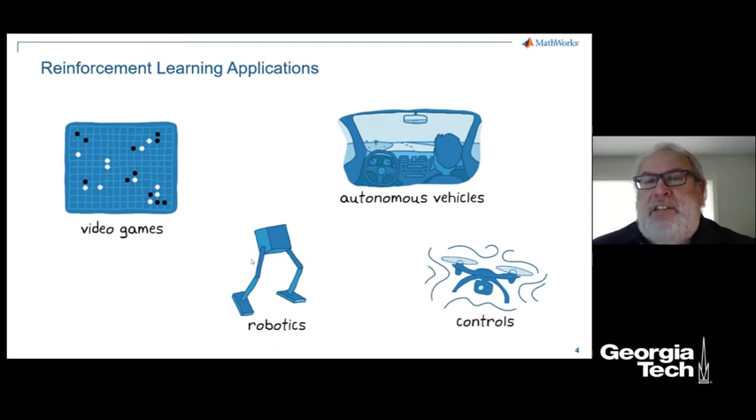So there's a lot of applications for reinforcement learning. Some of the most popular that you see in the news is with video games. You see stuff with the Atari games, AlphaGo beating the world champions. So there's a lot of video games and game type applications that we see in the news, which is very exciting. But it can also be used for autonomous vehicles, controls such as drones, and robotics. And the robotics application is the one we'll focus on today.

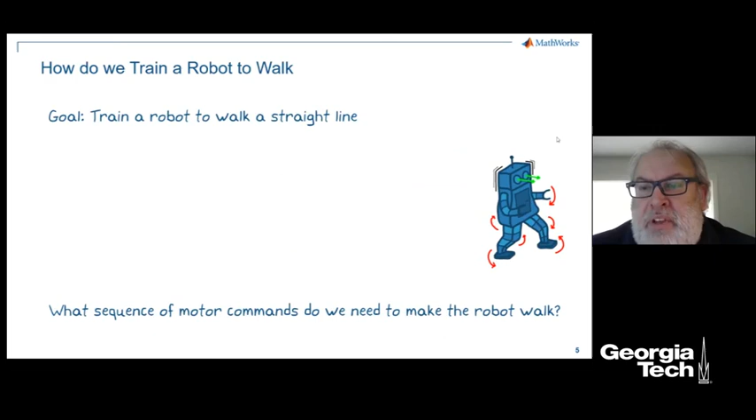So our goal today is to train a robot to walk in a straight line. So how would we go about doing this? So we have several motors that actuate the joints of the robot, and we need to determine what is the sequence of motor commands that we need to use to make the robot walk, right? So by selecting the right set of motor commands, we can get a locomotive behavior from the robot.

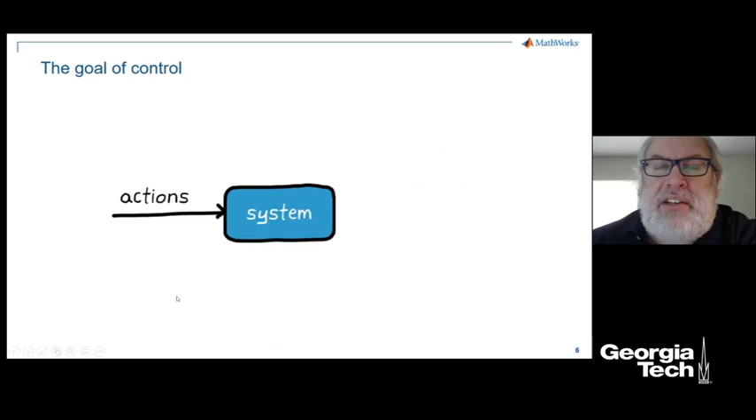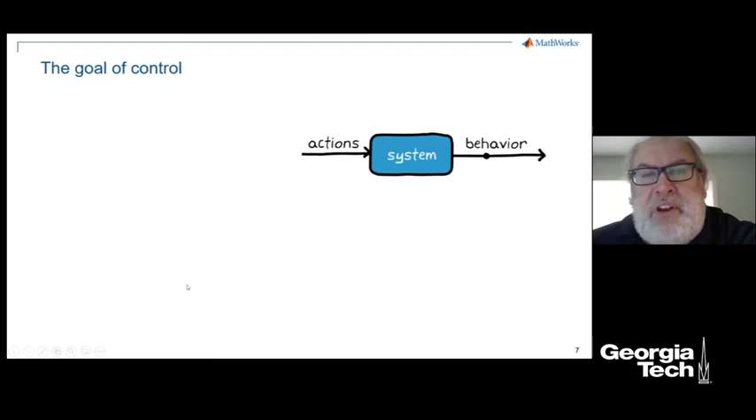And so typically you do this with control, right? So we have a system here. We provide some actions to the system, which results in a behavior. And the goal is how do we determine what actions generate the behavior that we desire? And typically, if you're familiar with feedback control, this is a standard problem where you observe the behavior. This could be observing the behavior through different sensors, such as encoders, accelerometers, vision systems, etc.

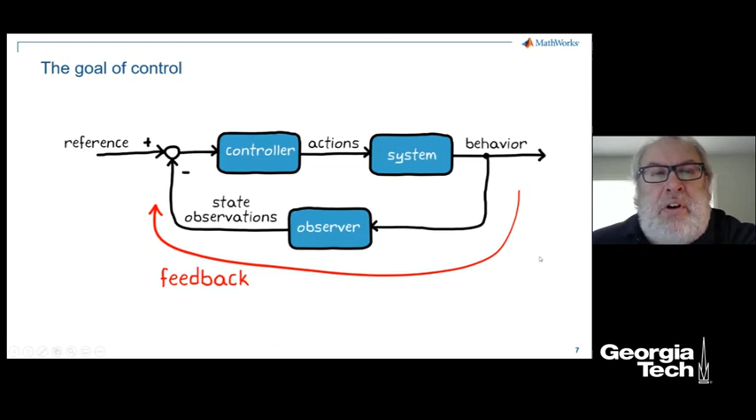You take these state observations and you compare them to what your desired behavior is, and then the controller works on this error between the desired behavior and the actual behavior of the system to determine what actions it should take next to try to achieve the desired behavior. And this is the concept of feedback control. So applying this to our robot system with the traditional controls approach, here we have observations, so we could have camera data coming in and sensors coming in from encoders from the joints, accelerometers, etc.

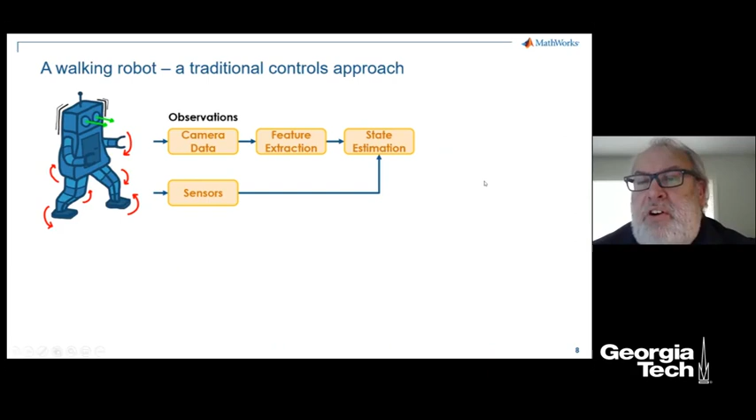And we want to determine data information from the system. To start out with, typically you would do some perception. You might have a vision perception engineer extract features from this camera data. And then using the sensor data with these visual camera feature extraction, you would do some sort of sensor fusion and state estimation or localization to get information about your current pose, where you're at in the environment, your current

state. And then you would feed these states into a control system to determine what motor commands you should use to generate the desired behavior. And in this case, we have 6 motor commands. We have one for the hip joint, knee joint, and ankle joint for each of the legs.

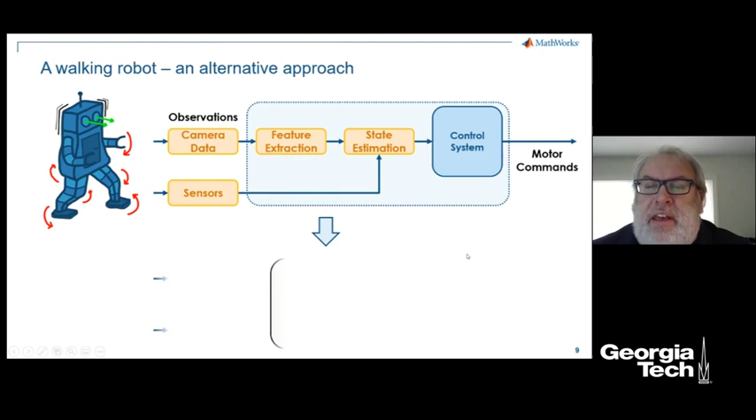So could we look at an alternative approach to solve this problem? What if we took all this stuff and lumped it into a single black box controller? So here we want to take the camera data and the sensors, put it into a controller and generate the motor commands explicitly. This would be nice if we were able to do this, but the question is, how do we design this complicated black box system?

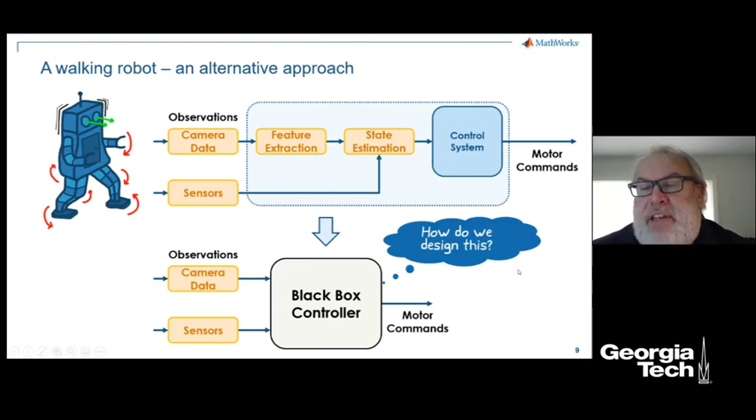And one way is reinforcement learning. So what is reinforcement learning? We'll use the definition that Sutton and Barto used from their famous reinforcement learning book. Reinforcement learning is learning what to do, how to map situations to actions to maximize a numerical reward signal. The learner is not told what actions to take, but must discover what actions yield the most reward by trying them.

An easy way to think about this is teaching a dog new tricks, right? So I have a dog here. The owner yells fetch and throws the stick. So the observation the dog sees is the stick flying and the owner yelling fetch. The dog may decide to fetch the stick. It may sit down. If it fetches the stick and comes back, you give it a reward, a treat, right? So you're reinforcing a behavior that you want the dog to learn.

And so that's the principle that we're doing. If you ever trained a dog, you'll notice that it's a lot of interaction getting the dog to do the right item. And then once it does the right action, give it a reward, and then it reinforces that behavior over and over again.

So before we get into solving the reinforcement learning problem, I'll go over some of the terminology that's used in reinforcement learning. There's 2 main components: the agent and the environment. The environment would include the robot or any physical items that are being interacted with. And the agent is really about the logic used to take observations and send actions. So you can think of it sort of like the brain.

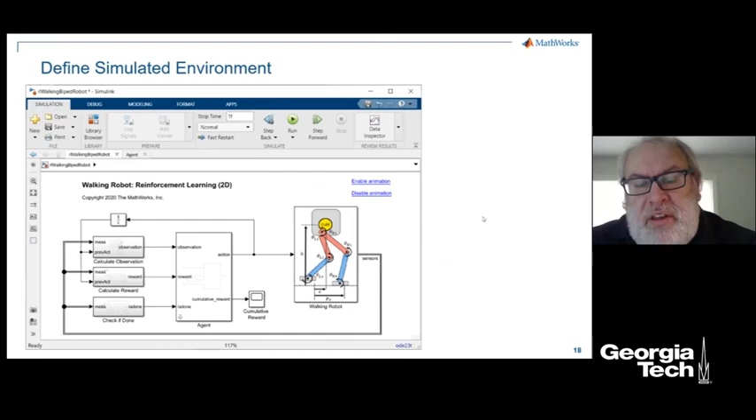So with that being said, we'll be focusing on a simulated environment. Here we're using Simulink to model the biped robot. We're actually modeling the robot using our physical modeling toolbox called Simscape. And we're able to model the dynamics of the system as well as the contact forces with the environment.

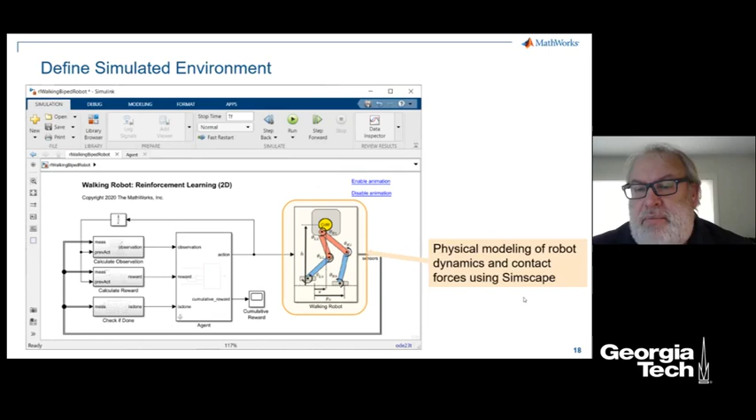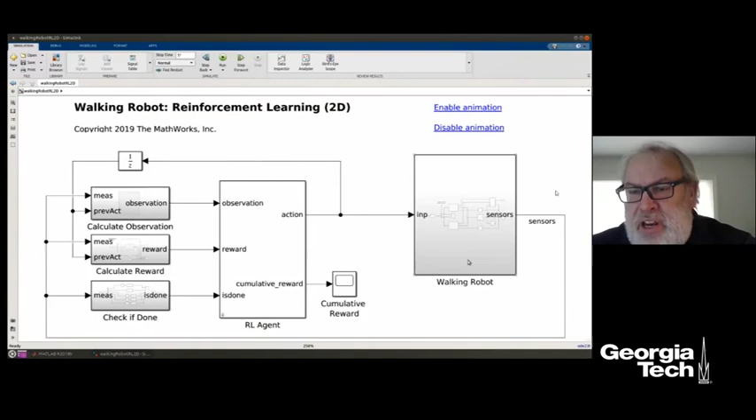If we take a look into this model, we have a couple blocks. We have the agent block, and then the walking robot, which represents the environment. We represent the robot's legs, left and right. We have some sensors, our world and ground, hips and torsos, etc. And we use the physical modeling package to represent each of the revolute joints and legs of the system. If we look into the sensors, we're measuring quite a few parameters of the system, which we'll be feeding back into our observations.

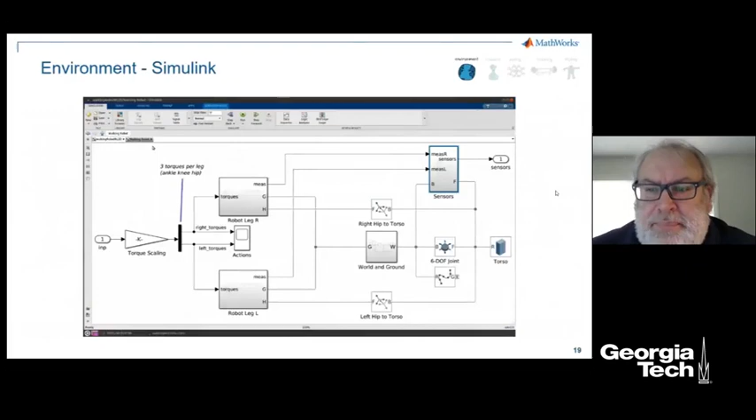The next piece I want to talk about is the reward. So now that we defined the environment, we want to focus on what is the reward for the task that we're trying to solve. So as I mentioned, the reward is a function that outputs a scalar number that represents the immediate goodness of an agent at a particular state taking a particular action. And our goal is to maximize this long-term reward for the system.

So in defining the reward, how do you translate a behavior into a numerical value, right? So we have to create a numerical value which encodes the behavior that we're trying to learn. So you can think of it as, how do I incentivize the robot? Is this the way you want me to go? Put some money out in front of the robot.

So what we did was, this is the final reward function that we came up with, and I'll go into further detail about how we came about it. But our reward is our current forward velocity, which is our goal. We want the robot to walk forward. We also don't want the robot to stray too far away from the straight line, so we have a deviation from the center line as a penalty.

We also want to make sure the robot stays upright, so we want to keep the robot at some nominal height. So we have a nominal trunk height that we want to maintain, and as it deviates, it penalizes from that. We want to make sure it walks as long as possible, so we're giving it a reward for each time step it remains upright. And we also want to minimize actuator effort, so we actually penalize how much torque we are providing to each of the motor joints.

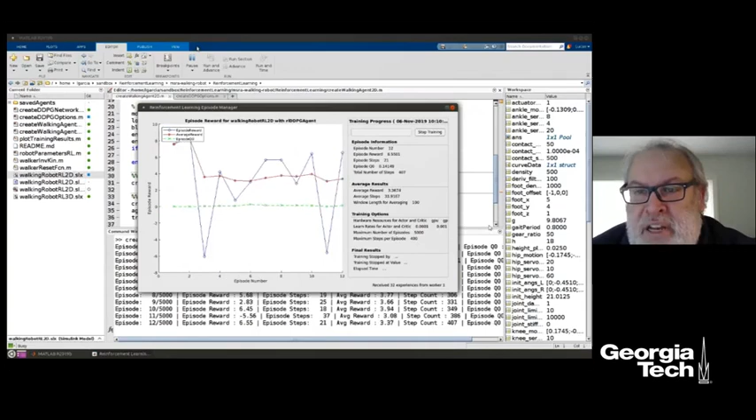So here's a video of it running. Initially it's running at real time here, and then eventually we speed it up for time purposes. But you can see the number of episodes. You can see it starting to run. Initially, we don't see it learning very much at the beginning, but once it learns to take a few steps of walking, it actually improves its learning quite a bit.

Here we have a dip. So one thing that's interesting with a lot of reinforcement learning methods is you'll go through these peaks and valleys of learning. But the good news is the trend is moving up. So our walking is improving the more samples that we take. And so here we see we ran 2,418 episodes.

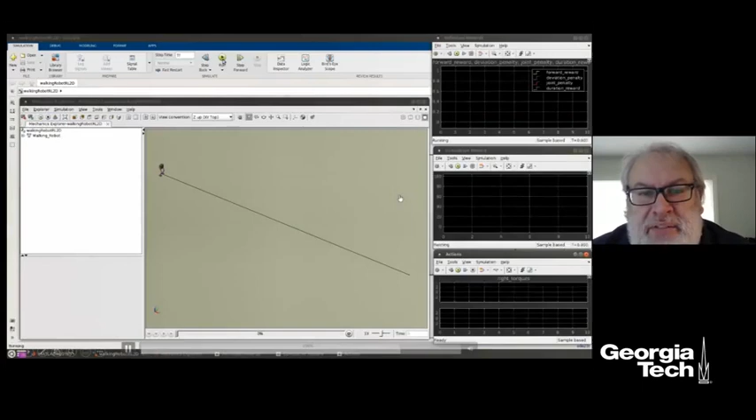And then finally, with that trained agent, we press play to walk with that trained agent. You can see that the agent's walking well and walking along the straight line. As it starts to deviate, it moves back to the center line. So here we saw an accelerated view of the training process and the final results of it walking. But let's look in a little bit more detail at how we got here.

Oftentimes you need to do reward shaping as part of the training loop. Oftentimes you'll see that the agent's having trouble learning, so you want to give it more incentive to learn and improve sample efficiency. So oftentimes there's a little feedback loop that you go through adjusting the reward system or the reward function. So why does the reward function matter so much?

So if you just started out, you might say, I want my robot to walk forward. So let's start out by just creating a reward which is just purely forward velocity. As we ran this with just this reward, it tended to get stuck in a local minimum of wanting to just fall forward. So it gets initial forward velocity. If we trained it longer with more exploration, maybe it would eventually learn to walk. But there's not much guiding the robot on what type of behavior it should be trying to achieve.

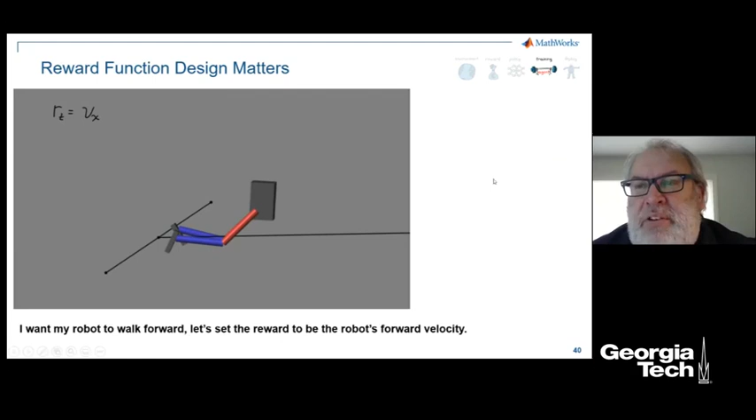So the next step we did was, let's add a reward for each time step the robot remains upright, and also give it a penalty for not maintaining a certain torso height. If we do this, we see that the robot does a better job of walking. However, it's not ideal. It's very zombie, very non-smooth. Looks like it's going to fall over a few times, but manages its balance. But it did do what we wanted it to do. We wanted it to move forward and maintain a torso height.

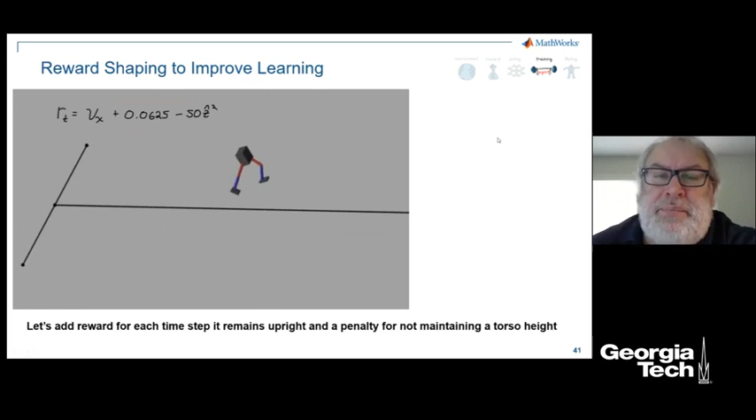So the next step, what we did was, let's add an additional penalty for the energy used for actuation. So here we added a penalty for the energy used in the motor torques for each of the joints. We look here, we see we start getting really good walking behavior, right? And it's walking more like a human. And if you think of a human, it evolved to have pretty efficient walking behavior, so it's kind of expected that this type of behavior would emerge as you start to penalize actuation and you want more efficient movement.

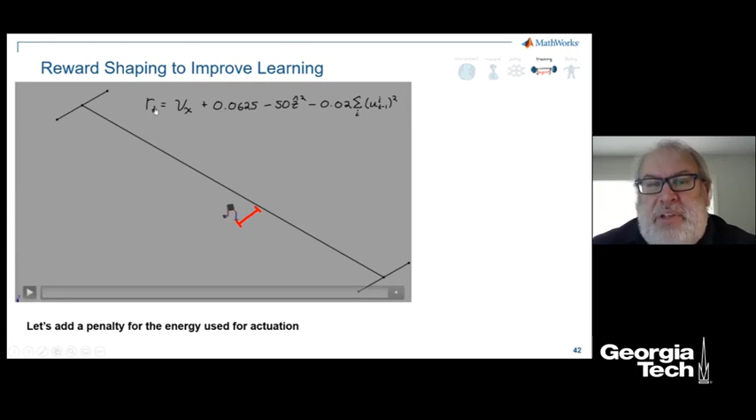However, you saw that the robot doesn't really maintain the center line. You can see that it deviates from it. And we never really told the robot explicitly in this reward function that was part of the task. All right. So the next step, we added a penalty for deviating from the center line. Once we do that, we see that we get good walking behavior. When it starts to deviate from the center line, it starts tracking back to the center line.

So the main key takeaway from here is the reward function matters. The sample efficiency of a reinforcement learning algorithm learning a particular behavior can be dramatically affected by how you incentivize the agent through the reward function. So now that we have a trained agent that we like, we did this through simulation. Now we want to deploy it onto a real robot.

Currently, there's a couple ways you can deploy to target. So here we have our offline simulation. We have a reinforcement learning algorithm, the policy, and then the simulated environment. And we're going to take this policy and put it onto the target hardware to see how well this policy works in the real environment. You can do this in the Reinforcement Learning Toolbox to automatically generate C or C++ code for the policy, as well as CUDA code if you're running on a GPU, to run the policy on an embedded device.

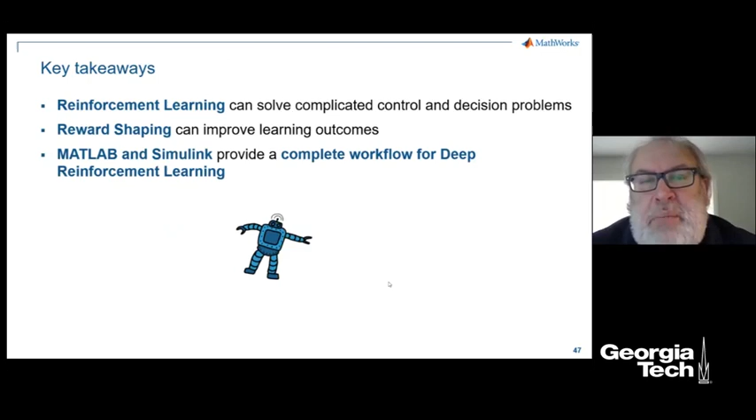Reward shaping is very important in improving learning outcomes. We find this is one of the trickier parts, coming up with good reward functions that improve sample efficiency as well as map out the desired behavior that you want your agent to learn. And then MATLAB and Simulink with the Reinforcement Learning Toolbox provide a complete workflow for deep reinforcement learning. So here we went through the example for this biped robot. This is a shipping example, so you can actually find it in our documentation as well.

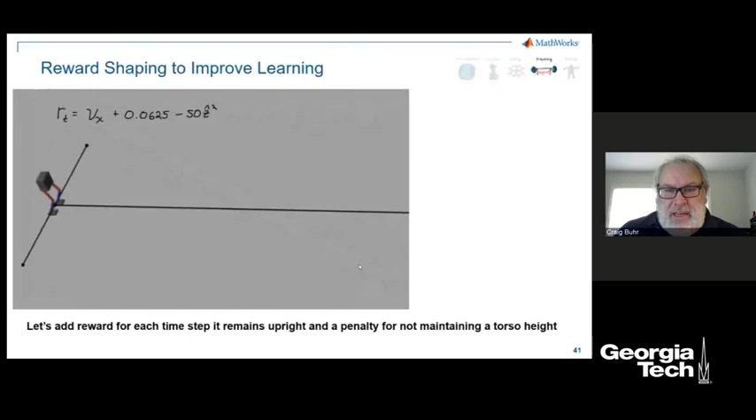So there are a lot of questions in the Q&A. Noah asks, how long did it take in real time to train the biped robot? I need to go back to the simulation. Unfortunately, we have this in seconds. 19,514 seconds, and I'm not good at doing math in my head. So that's the actual elapsed time from the training. And I think we had 8 workers.

Zhao asks, in the example, it appears the real robot application does not have a reinforcement learning module, but rather a policy module. Is the policy not updated in the real robot application? Yeah, so we didn't actually deploy this to a real robot yet. But we've deployed the policy to some simple examples, like a BeagleBone Blue, where we've done some experiments deploying the policy to hardware. We currently don't support learning on the hardware itself explicitly, only deploying the policy, and we're currently working on providing functionality to learn directly on the hardware as well.

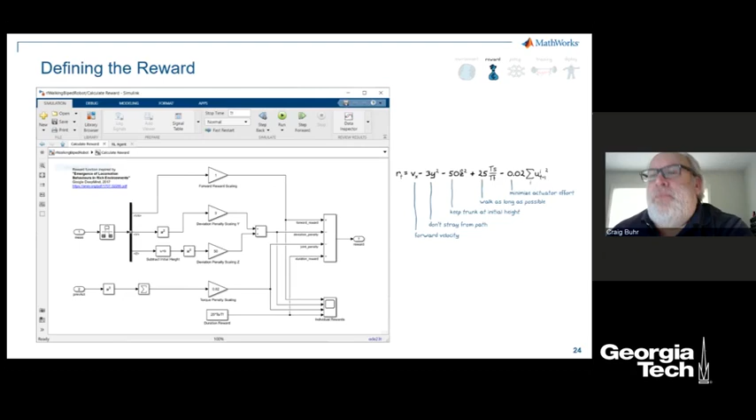The state and action. Sometimes there's also the next state as well, meaning if your next state took you into a bad location, you have the next state. But yeah, so typically reward is a function of the state and action, and also sometimes of the next state resulting from that action taken in that state.

What happens if the state space or action space is continuous when you try to maximize the Q? Do you take gradients? Yeah, so actually it uses a gradient-based method to update the network weights. So in this case, the actions were continuous.